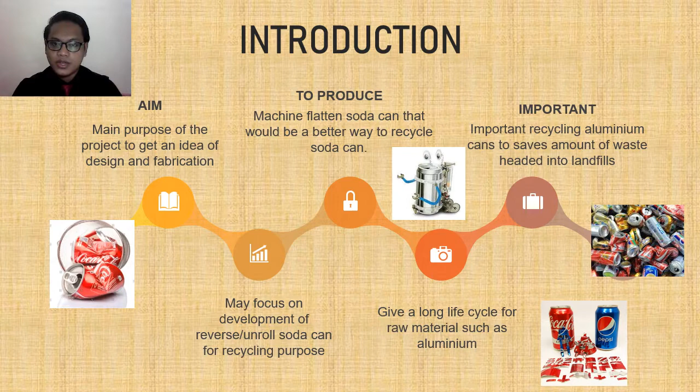So the main purpose of the project is to get an idea and to fabricate the product. This may focus on development of reverse and unroll the soda can for recycling purpose. To produce a machine flattened soda can, there will be a better way to recycle a soda can. This may give a long life cycle for raw materials such as aluminum cans. This is important for recycling aluminum cans that save amount of waste headed into landfills.

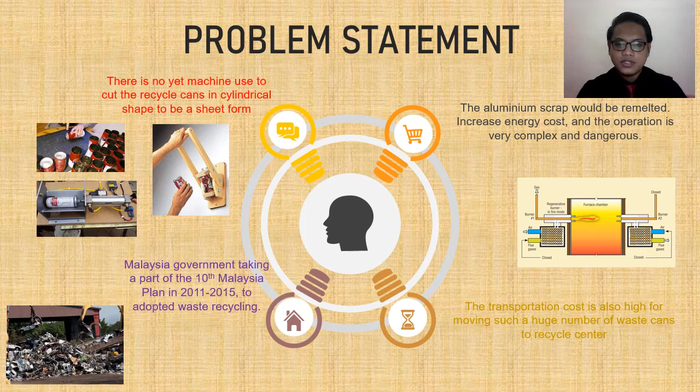Nowadays, we can see that there is no machine yet used to cut the recycled cans in cylindrical shape to be a sheet form. The aluminum scrap will be remelted, but it will increase energy cost and the operation is very complex and dangerous. Malaysia government is taking part in the 10th Malaysia Plan in 2011 until 2015 to adopt waste recycling as a long-term strategy for municipal waste management. The transportation cost is also high for moving such amount of waste to the recycle center.

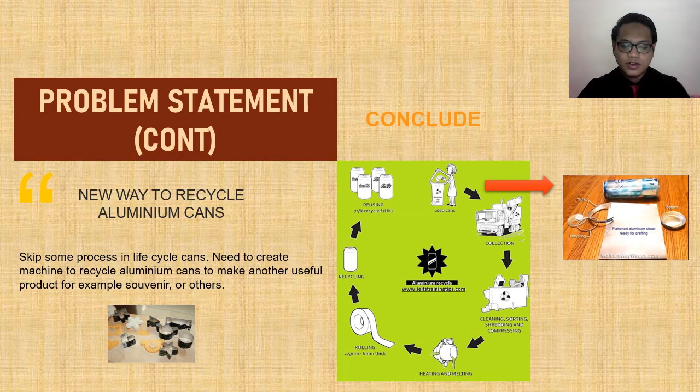When we talk about the new way to recycle aluminum cans, we may skip some process in life cycle of cans. So, we need to create a machine to recycle aluminum cans to make another useful product, for example as souvenir or others. So, the objective of my project is to study the development of reverse and unrolled soda can machine for recycling purpose, to design a safe machine to cut the aluminum cans and flatten it into sheet form, and lastly, to fabricate the machine in purpose to recycle the waste aluminum cans into a flattened sheet.

Scope of my project is available size of aluminum cans in Malaysia market, identify the best movement mechanism and cutting method, and lastly to study the potential of machine to be integrated to the other machines with further step and function.

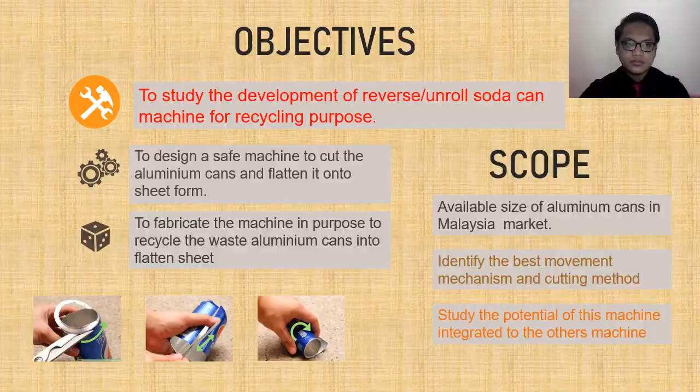For the literature review, I will study some articles and journals such as Aluminum Alloy 3004 written by Azom in 2012. This may identify the material properties of the aluminum cans. Next is Recycling of Aluminum Beverage Cans written by Layla in 2018. The journal is to investigate the melting process of recycled aluminum cans.

Next is Beverage Can Life Cycle written by Crown in 2018. Through the recycling, its value is retained and make it for the future. Next, Trends in Packaging of Food and Beverage, written by Neil Farmer in 2013. This may study the market available size of the soda can.

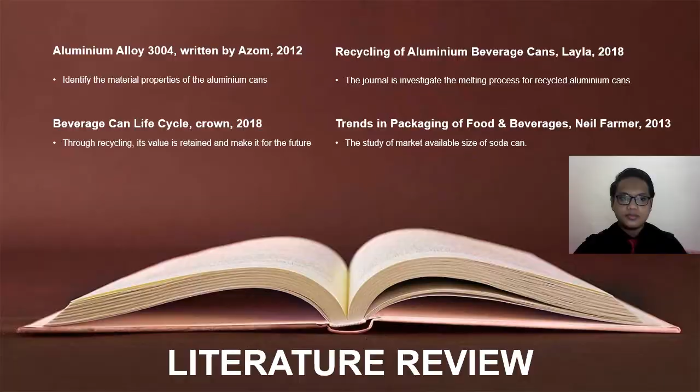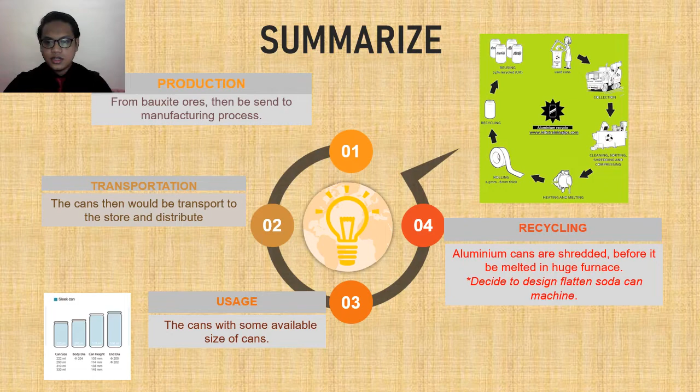From the literature review, I can summarize that at production, aluminum is collected from bauxite ores and then sent to manufacturing process to be molded into cans, then transport the cans to the store and distribute to the vendor companies. After that, the usage. The can comes in some available sizes depending on the beverage volume in one can. And lastly, for recycling, the aluminum is shredded to remove any color coating before it is melted in a huge furnace. So I decide to design a flattened soda can machine as a new way to recycle aluminum cans.

For the methodology part, here is the flow chart from the start until the end of the project. To achieve objective 1, which is to study the development of reverse and unrolled soda can machine for recycling purpose, I have to do some research and study on the articles and journals available. To achieve objective 2, which is to design a safe machine to cut the aluminum cans and flatten it into a sheet form, I have done the project planning and then concept design sketching. After that, I can do the final design in CAD/CAM by using Autodesk Fusion 360.

And lastly, for objective 3, to fabricate the machine in purpose to recycle the aluminum cans into a flattened sheet, I have done analysis before I fabricate it.

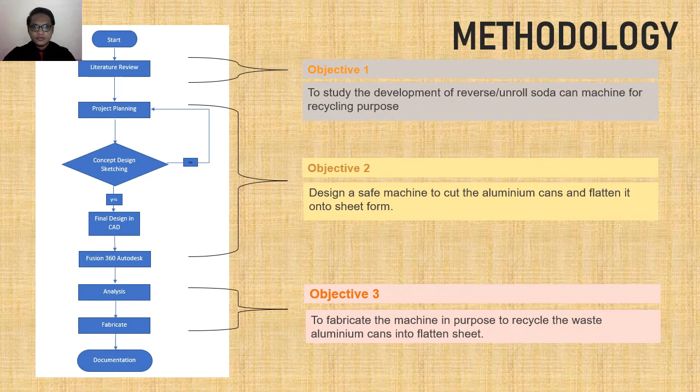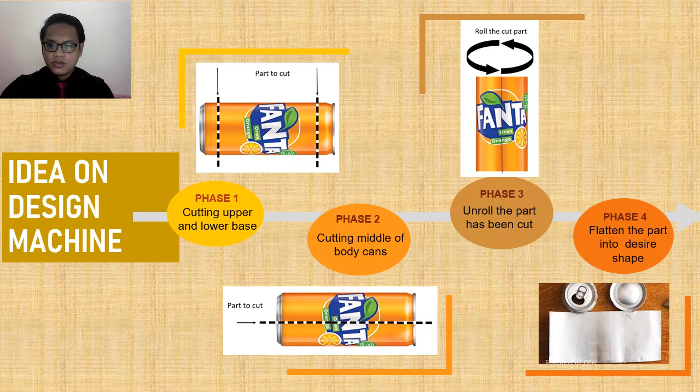Here is my idea on designing a machine. At phase 1, the machine must be able to cut the upper and lower base of the cans. At phase 2, the machine must be able to cut the middle of the body of the cans. At phase 3, the machine must be able to unroll the part that has been cut. And lastly, at phase 4, to flatten the part into the desired shape.

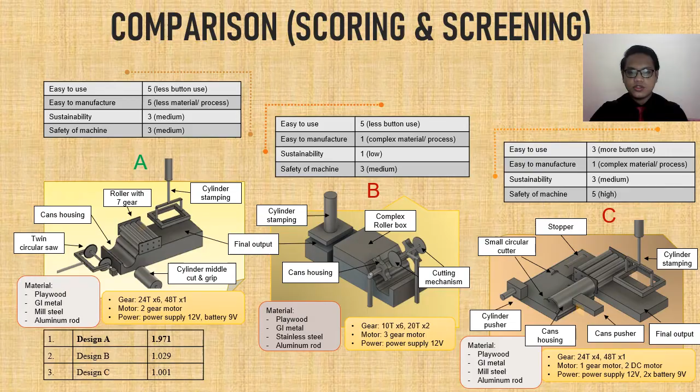Here is my result of fabrication of the flattened soda can machine. From the research and some analysis, and considering the function of the machine, its purpose is to cut the cans and flatten them into sheet form. So we can see here there are some stages. Firstly, cut the upper and lower base of the cans, then cut the middle body of the cans, then the roller mechanism, and lastly a stamping process.

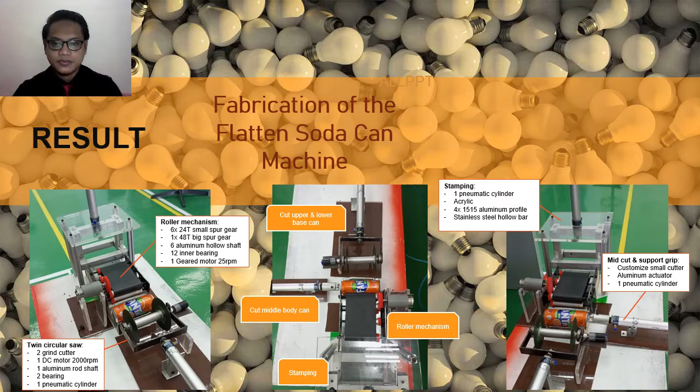I have done some structural analysis for the cutting force. I got the final result of cutting force of 200.79 Newton, which means the cutting tool must provide more than 200.79 Newton. So I decided to choose from 3 motors with different RPM, 1000 RPM, 2000 RPM, and 4000 RPM. And the final calculation I got for the 4000 RPM is 438.65 Newton, which means the motor can generate more cutting force to be able to cut the cans.

Then for the pneumatic cylinder, I have chosen the larger diameter that can give more force to do the stamping process. And lastly, for the roller mechanism, I use a spur gear to drive the roller. So I decided to use a motor at a lower RPM to generate the slow motion of the roller needed to flatten the soda cans.

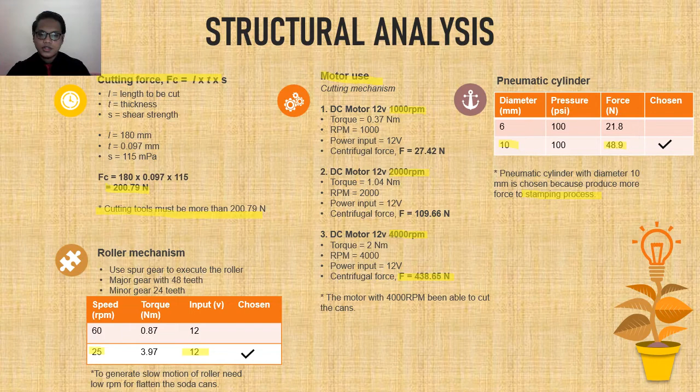Here is the functionality of the product. At the cutting phase, a pair of circular saws is used to cut the upper and lower base of the cans. It may take several passes to completely cut the upper and lower base. Next is grip and middle cut. One cylinder with a small cutter at the end of the piston is used.

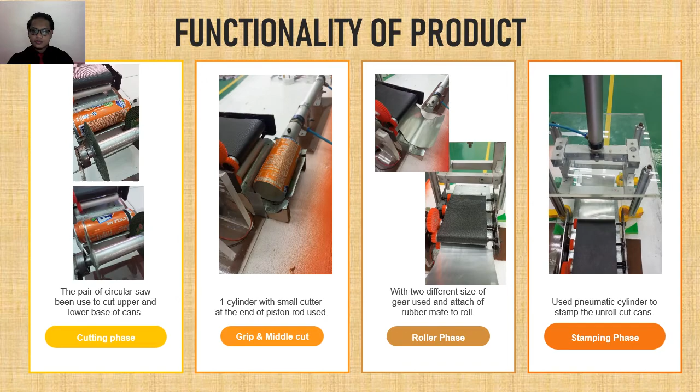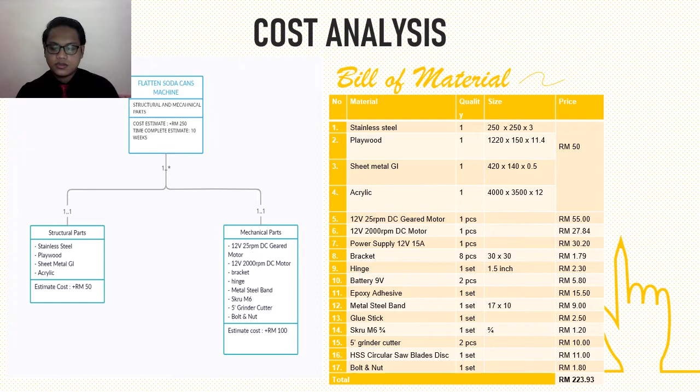Next is the roller phase, with two different sizes of gear used and a rubber mat attached to roll the cut cans. And lastly, at the stamping process, we use the pneumatic cylinder to stamp the unrolled cut cans. In cost analysis, after I structured the components and parts of the machine, I did the bill of materials, and the total cost is 223 ringgit and 93 cents.

For discussion, as you can see at roll 1, the soda can cannot be completely flattened until roll 5. In my view, this project will need to be developed more in the future to improve the function and output result. From the output result, the cut cans need to run more frequently to get the best result. For improvement and recommendation, at the cutting phase, the motor used for the cutting mechanism needs more torque to be able to cut the soda cans. Also, the cutting mechanism can be replaced by a laser engraving operation.

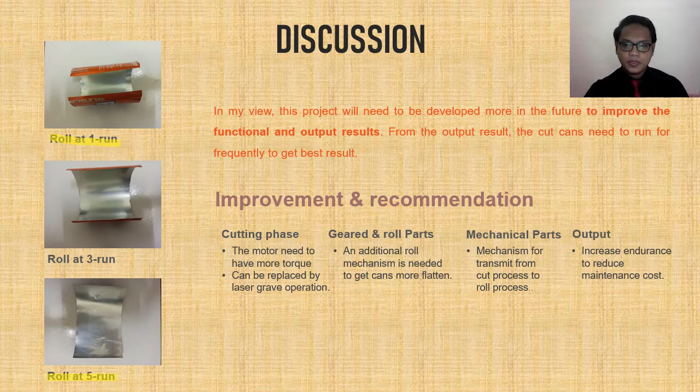Next, for the gear and roll parts, an additional roll mechanism is needed to get the cans more flattened and get a better result. For the mechanical parts, the mechanism for transmitting from the cut process to the roll process needs to be replaced to get more frequent movement. And lastly, at the output, increase the endurance of the functioning mechanism, which can reduce maintenance costs.

As the conclusion, the objective of the project is achieved. This fabricated machine is a new way to recycle cans. The machine is easy to use and place anywhere, with minimal parts used. The machine also has the opportunity to be applied with new technology to make it more efficient and make more profit for the user. So, the project has the potential to be incorporated with other functions.